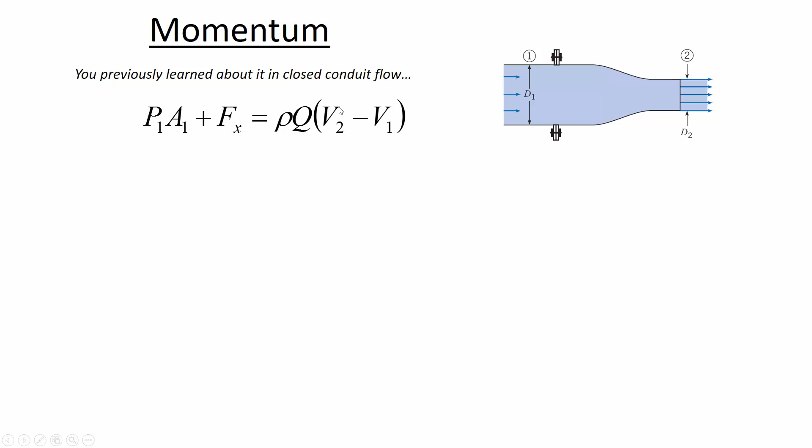Now in open channel flow, there's also momentum, and there are two components of momentum: the part related to external forces applied to the control volume. Consider water flowing downhill where the depth is changing—just to make the point that this is non-uniform flow, and momentum is conserved even under non-uniform conditions.

At location 1, where the depth is shallow, there's water on the other side of this water—this is just the water in our control volume that we're analyzing. The water on the other side pushes on it with a force equal to the depth to the centroid, the area, and the unit weight. Now, this first component is the dynamic component of momentum—it's related to the movement of the water, the fact that the water here has some velocity.

Now, the units are a bit odd right now. If we multiplied both sides by the unit weight, then you'd get the units of force there. Let me write that on the board.

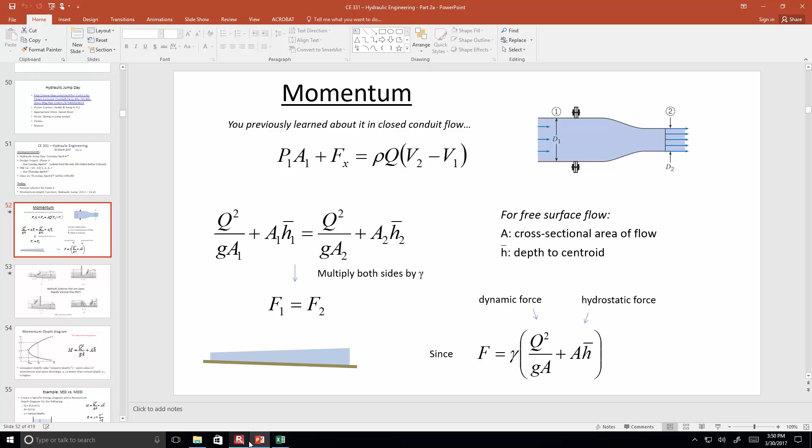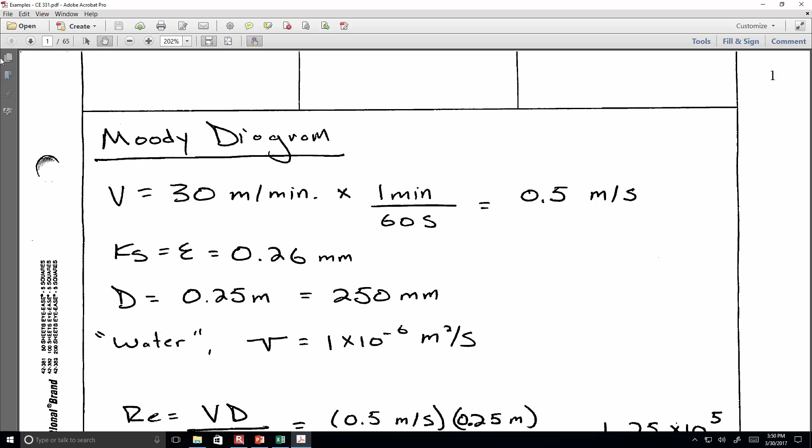For the benefit of those watching at home, let me pull up the examples because I have that same stuff that I just showed on the board, the units. I wouldn't want anybody to miss out on a good units analysis.

All right. Any questions about the units of momentum?

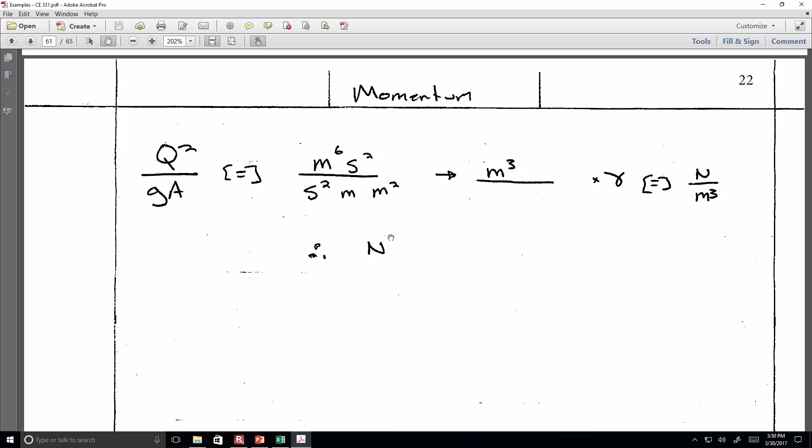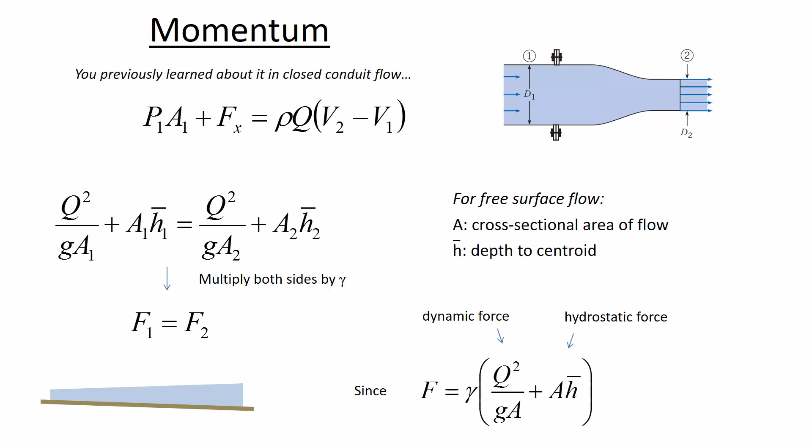So the two components of calculating the force in open channels from momentum, the dynamic force and the hydrostatic force, are related to the movement of the water and the forces on the outside of the control volume.

So why we care about momentum is related to hydraulic jumps. Tuesday is hydraulic jump day, so I figure you better learn a little bit about that before it occurs. Hydraulic jumps

happen when there's some sort of change in flow that forces supercritical flow to become subcritical flow. In this first picture, we have a really steep slope. The slope initially is so steep that it's causing supercritical flow, and that slope that causes critical flow is S sub c. So at point 1, the slope is steeper than the slope that causes critical flow. You know it's supercritical because the drawing shows where the critical depth should be, and our actual depth is less than the critical depth. So that confirms the slope is supercritical.

But then it's transitioning to a subcritical slope. We know it's subcritical downstream because the actual depth of flow is more than the critical depth of flow, what the critical depth should be—that's what this dashed line shows. Anytime you have flow that transitions from super to sub, there will be a hydraulic jump. Here, the hydraulic jump might be upstream of the transition, or downstream of it. It can actually be in both places depending on the exact downstream depth. So here's one instance that can cause it.

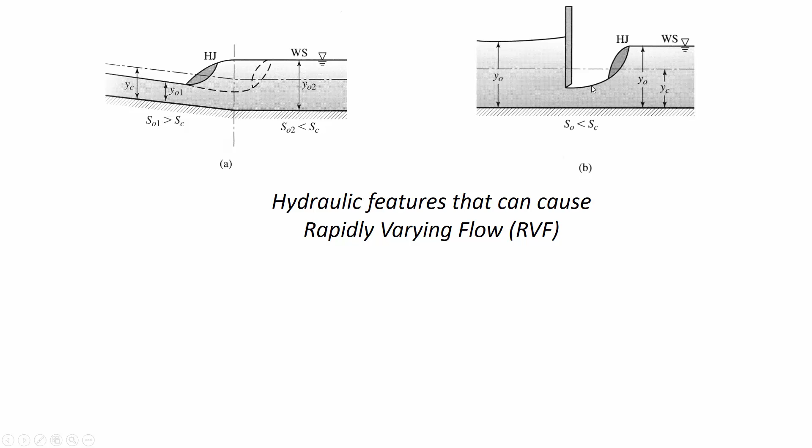So there are actually a couple of things happening here. There's gradually varying flow as the depth increases, but then there's rapidly varying flow at the hydraulic jump. RVF stands for rapidly varying flow, and that means a hydraulic jump. Gradually varying flow we'll talk about after hydraulic jumps, and we have to go through a lot of effort to calculate the rate at which water makes these gradual transitions.

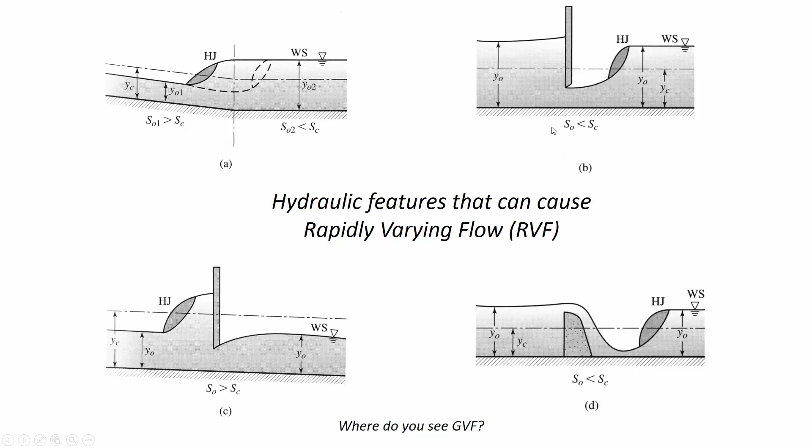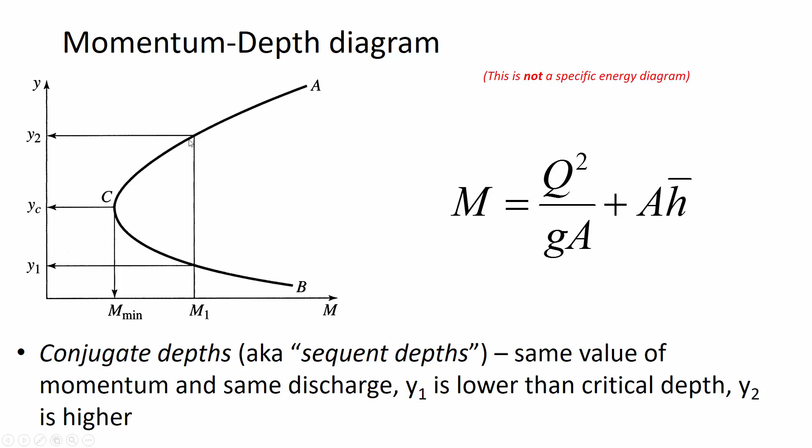Now, energy is not conserved through hydraulic jumps - there's a lot of energy lost in the turbulence of that roiling flow. But what is conserved through the hydraulic jump is momentum. So that's why we use a momentum depth diagram - graphically it allows us to find the downstream depth y2 after a hydraulic jump.

So let's try this out. If you have Excel with you, you can follow along - if not, you can just watch and be less amused. We're going to calculate this. There's a starting file online, so you can start from scratch if you like, but if you go to the course web page, there's a folder that says some class spreadsheets, something like that.

Oh, this computer's just miserable. It's so slow. Yeah, that one's pretty bad too.

Okay, so if you go to Blackboard, then you can get the starting file for this. I'll leave it up so you can do it later if you like. Under selected Excel files from class, it's the second one, momentum depth diagram. So here it is, our download.

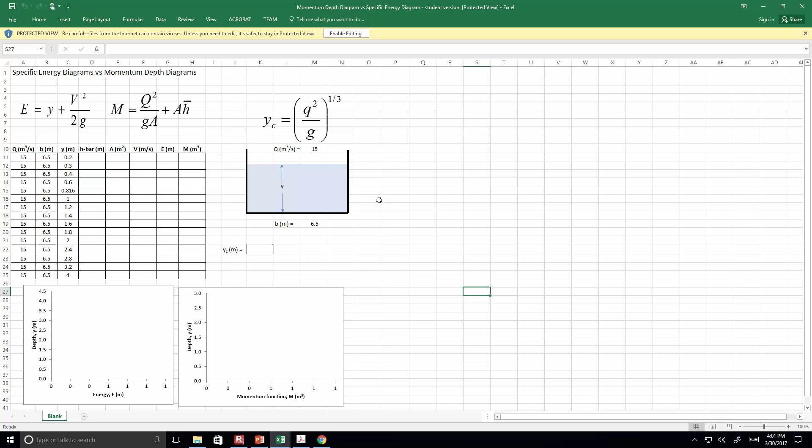So with this starting file, what we're going to do is calculate both the energy and the momentum.

I've just selected, based on creating a nice looking graph, a variety of depths. You don't necessarily always know what the starting depth and ending depth should be until you actually start graphing it. So it's not always going to be 0.2 as your beginning depth and 4 as the ending. You may need to make adjustments on the fly, but for purposes of illustration, we'll do these.

Now, h bar is the depth to the centroid. In a rectangular channel, the depth to the centroid is just from the water surface halfway down to the bottom. So it's easy in this case, because the depth to the centroid is just y divided by 2.

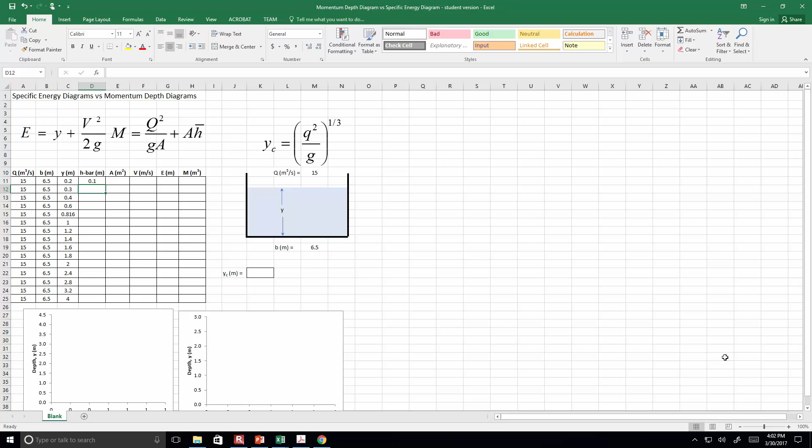So then I can drag that down and apply the formula everywhere.

Anybody want to hazard a guess why we're looking at the depth of 0.816? Good guess, you're right, that's going to be the critical depth. Just coincidentally, it worked out that way because I thought that'd be a nice depth to graph.

So the area here is going to be the width times the depth. Okay, so we've got the area, and then the velocity at each of these different depths will be the flow rate divided by area. Q equals VA, so V is Q divided by A.

So the velocity is progressively getting lower and lower. When we have deep water, it's because you've got a shallow slope. When you're trying to convey a certain amount of water through a channel, if the slope is shallow, that means the water is going to be very deep and you need a very tall channel to do it. But if you've got a high slope, then the water doesn't need much depth to convey that same amount of flow.

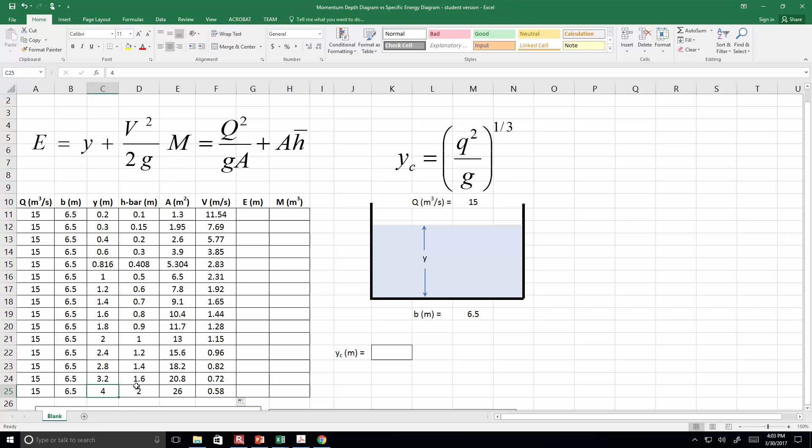Now energy, we're going to use this equation for energy, this one. It's going to be the depth plus the velocity head, so V squared divided by 2G.

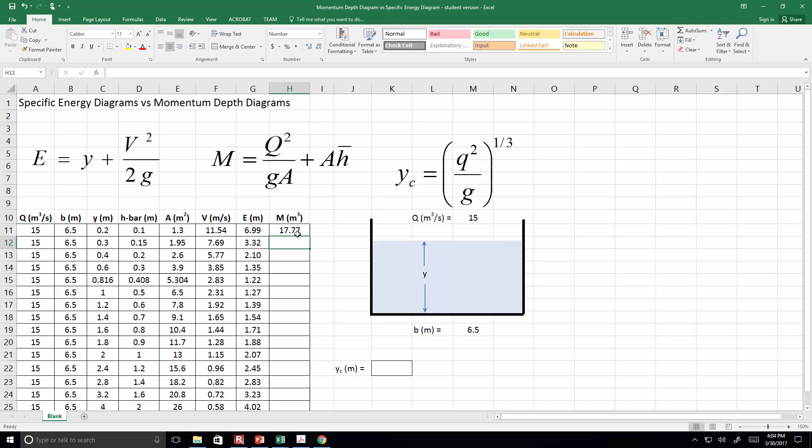So then I can apply that all the way down through. And then the momentum equation is going to be the flow rate squared divided by G divided by the area, and then adding the area times the depth of the centroid, h bar. And then we'll just add the momentum function down through.

Now here in the graphs, miraculously they appear. So on the left one here is the energy, specific energy diagram, and here's the momentum depth diagram.

So you use the specific energy diagram if you had like a step down or a step up and you wanted to find out what will be the new depth in response to that change. The momentum depth diagram, you would use this for a hydraulic jump. Two different applications, but now you know how to make both.

Any questions about that? Okay.

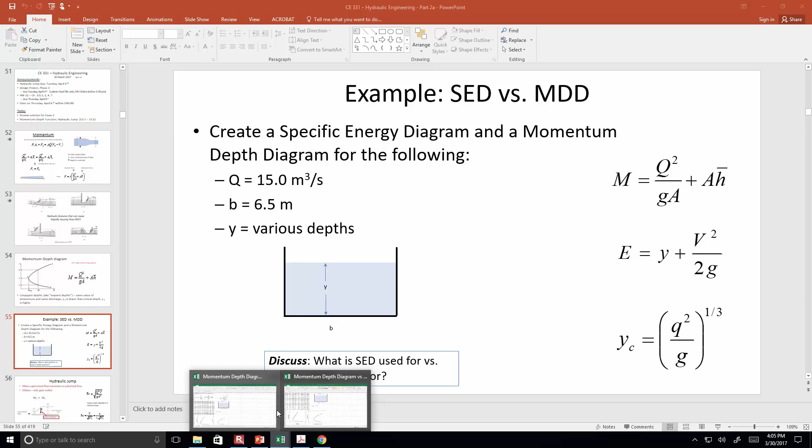Oh, I guess I wanted to calculate the critical depth here. Let's do that, just to show where that came from.

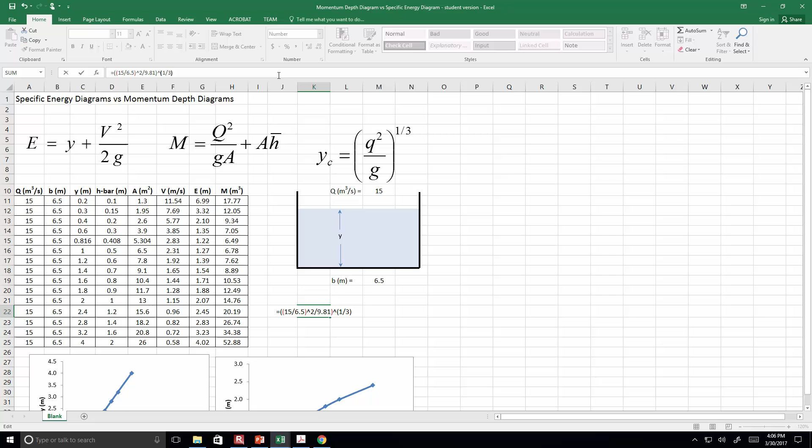So the critical depth would be the flow per unit width. So 15 is the flow, the unit width, the width of the channel was 6.5. Okay, and I need to square that, and then divide it by G, 9.81. And then I also need to put in the parentheses because I'm going to take everything to the 1/3 power. Okay, so the critical depth is 0.816.

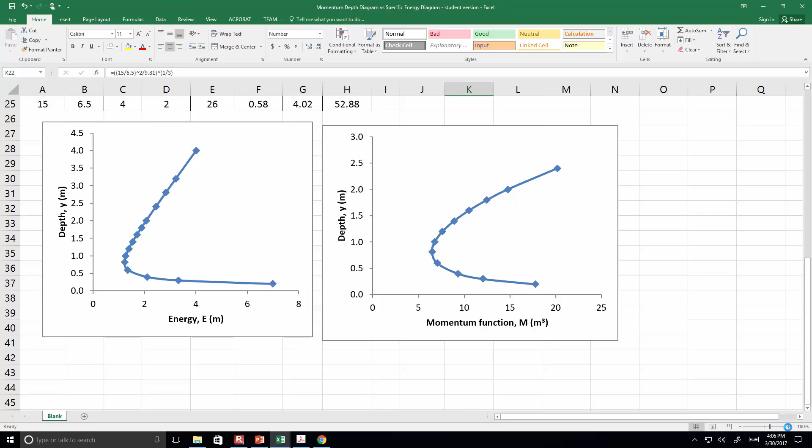So what that means is, here on this diagram, there's the supercritical portion of the momentum depth diagram below the critical depth. So anytime we've got flow less than this 0.816, we have supercritical conditions, and it'll go through a hydraulic jump up to the subcritical.

Now, there isn't anything as dramatic as a hydraulic jump when you have subcritical flow transition down to supercritical flow. Sometimes that can occur if you've got water approaching a drop-off, for example. There are other things that cause it, and we'll go into a lot of detail about what kinds of features can cause gradually varying flow.

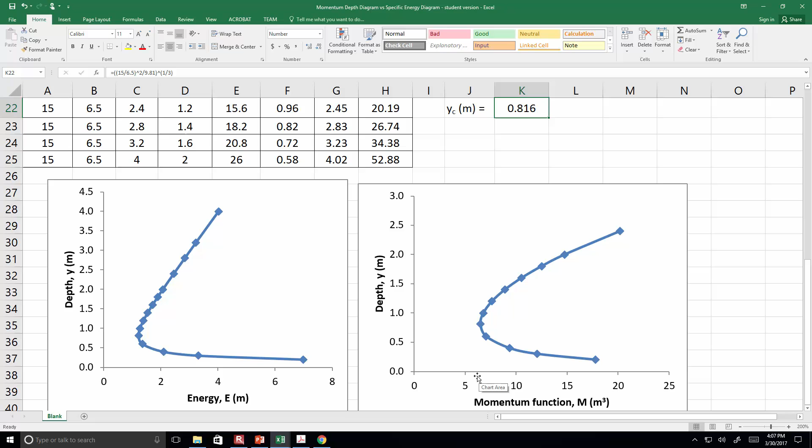But if you have subcritical flow approaching this drop-off, then it will go through a period where you've got maybe supercritical, briefly. So this was sub, and it's not dramatic, it's just a gradual transition. The only time it's dramatic and a big jump, a hydraulic jump, is when you're going from supercritical flow that can't be sustained anymore based on the shallow slope, and then it has to jump up to meet its conjugate depth.

That's right. You got it.

So the hydraulic jump has an upstream depth and a downstream depth. You can find the new downstream depth by graphing the momentum function, like we just did in the example, and solve it graphically. There's also a momentum equation where you can do it numerically. I'll show you that in just a minute.

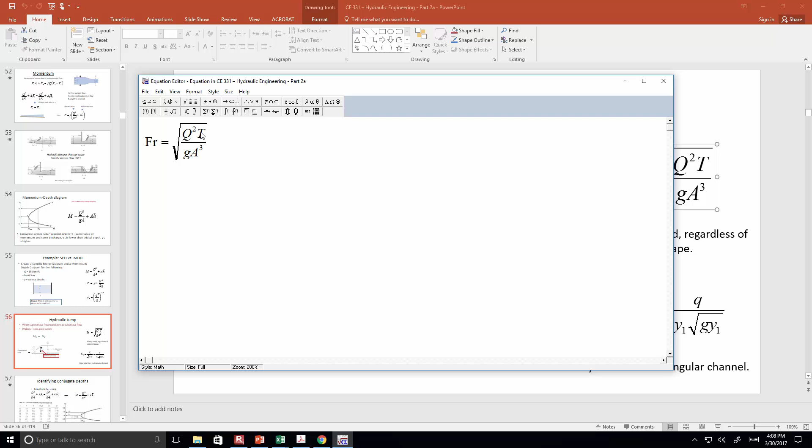It's important to remember how to calculate the Froude number, because the Belanger momentum equation makes use of the Froude number. This is the version of the Froude number you should use for any kind of flow channel, whether it's trapezoidal, triangular, or whatever else. But if you have a rectangular channel, you can calculate the Froude number this way, only if it's rectangular.

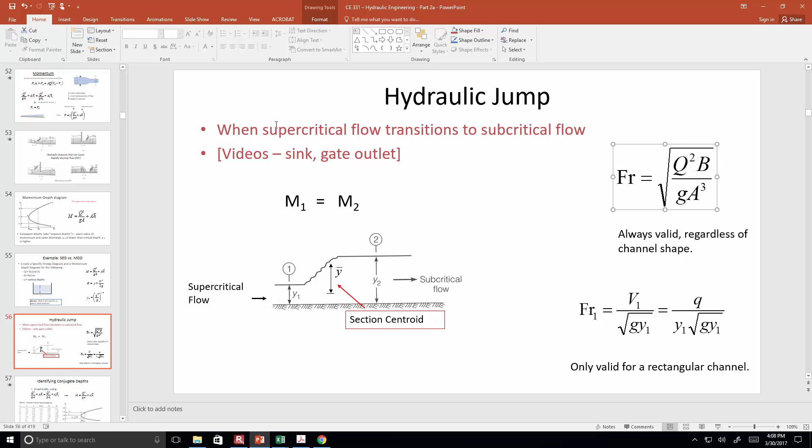Because you'll need the Froude number for the Belanger momentum equation. Now, I've got a couple of videos showing hydraulic jumps, but they are QuickTime videos, and I'm not sure if that's going to work in here. So let's just give it a try. There we go. What have we got? Maybe VLC. Usually works.

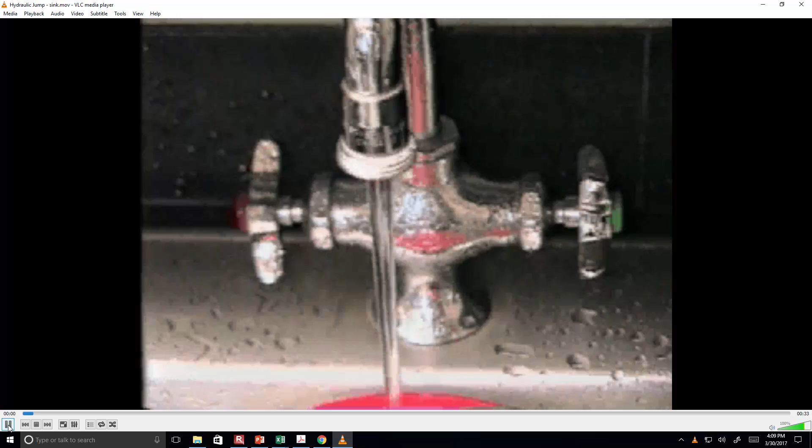All right, so this is someone doing the dishes, thinking about fluid mechanics, as we all do, right? So the water's coming out of the faucet and it's hitting a flat plate, and the water has velocity. So when it hits the plate, right now the water isn't flowing very fast, but they're going to turn the handle and increase the flow rate and therefore increase the velocity of the water. Watch what happens as they do.

All right, so now the water all the way around this rim, that's supercritical flow, and it can't be sustained on a flat surface. As the water is slowing down, it reaches its sequent depth, goes through the jump, and now the water is expanding radially. It's kind of hard to think in radial terms sometimes, since we usually just have these cross sections. But here the water is moving outward away from the stream, and it's a hydraulic jump.

So you don't have to have access to a flume to witness the beauty of a hydraulic jump. You could make one at your house today. But I'm certainly not suggesting that you do dishes, because I know that is not at the top of anybody's list, especially when you're in college. So they can adjust the location of the jump by varying the flow rate up and down.

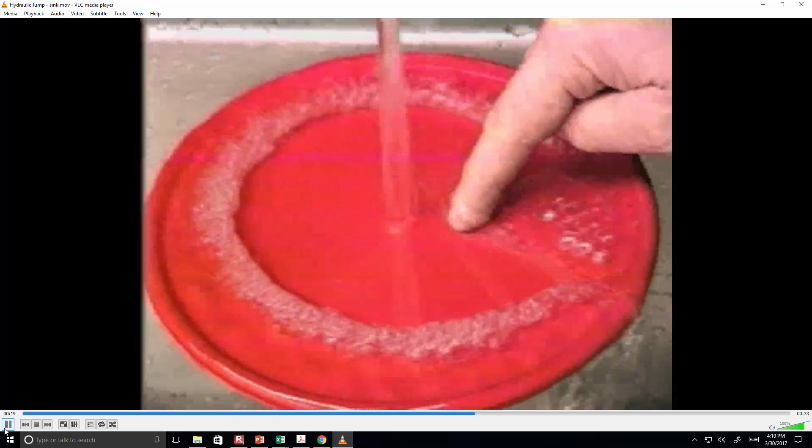And this guy's so into it he can't even resist touching it. Now the flow rate's so high that the hydraulic jump... well, you get the idea though. Supercritical flow, all around it is subcritical flow. Any questions about that? Okay, yeah, it is cool.

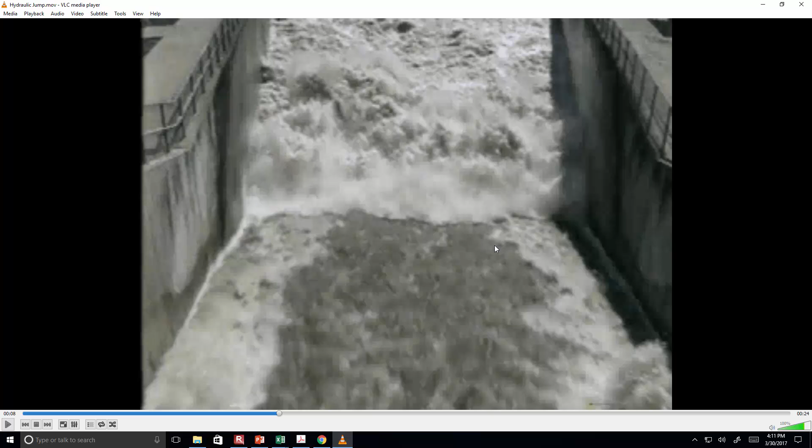All right, let's open the other one. This is a little bit larger scale. This is water coming out of a dam, and this is one of those cases where the water has a lot of velocity, because in this case it's coming from an underflow gate. So it's supercritical conditions, but it can't be sustained. This is in a chute that's specifically designed for a hydraulic jump to occur.

It's really heavily armored concrete, because you look at this roiling water, it's really turbulent, and there's a lot of energy being dissipated there. It would just tear apart any kind of an earthen channel and send that sediment downstream. So here we're seeing a hydraulic jump in its more natural environment. Well, not natural - it's an engineered system, but it's not somebody's kitchen sink, is the point.

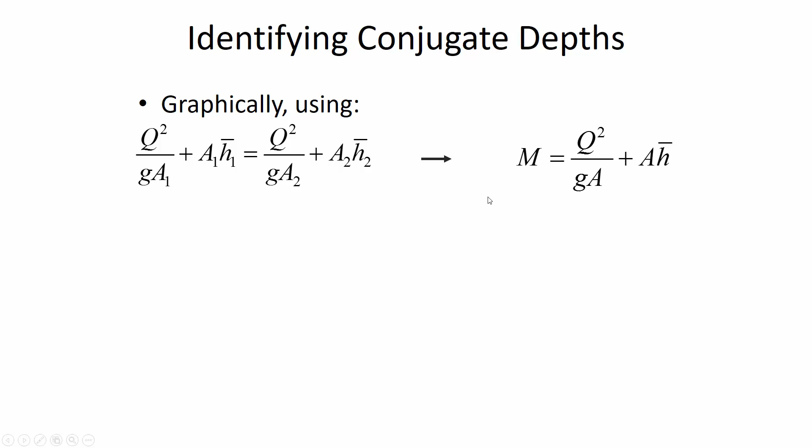So you can do it graphically by graphing the momentum function, and here's one illustration of how you could do that. Let's say, for instance, that we made a table of the momentum function, and then we graphed the momentum function, similar to what we just did in class. And we knew that we had an initial depth at 1 of 0.6. I assume that these are meters.

I don't know, it doesn't say. So we have an initial depth of 0.6. So you'd come over from the y-axis, find the intersection with the curve. So that's a supercritical depth initially, which means that eventually it's going to jump up to its sequent or conjugate depth. And that conjugate depth, we can come over here to y2 and find out that it looks like about 1.4 is the conjugate depth there. So the point is you're trying to find the same amount of momentum.

So here it was 5.33, so it looks like it's going to be between 1.2 and 1.5, where it has that same amount of momentum. You could solve this using goal-seek on Excel. You know, you could keep changing this depth - see the cell where it says 1.5? You could do a what-if analysis. Goal-seek, and tell it, keep changing this depth until this momentum, the one that says 6.01, keep changing it until it equals 5.332. And then that would tell you what is the depth that matches the same amount of momentum that existed upstream.

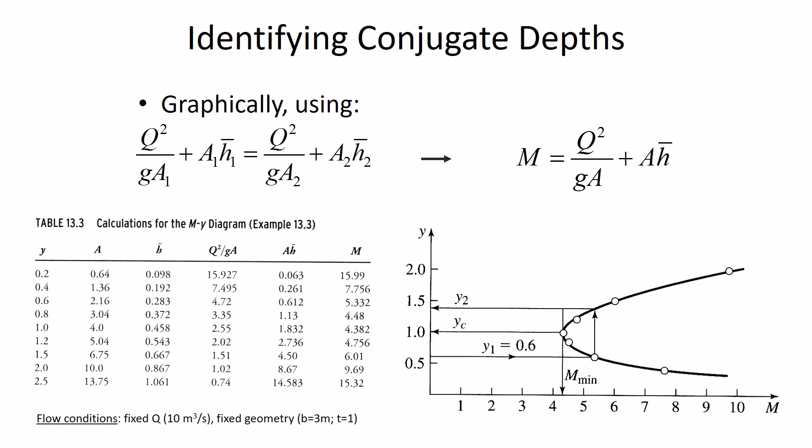So where's most of the momentum in the supercritical depths? Because the momentum, remember, is in two places - the dynamic component of the momentum and then the static component of the momentum. So here in the supercritical range, where the depths are low, where's the momentum? It's mostly in the dynamic term. And then on the other side of things, where you've got the larger than critical depths, then the majority of the momentum there just exists as the static term.

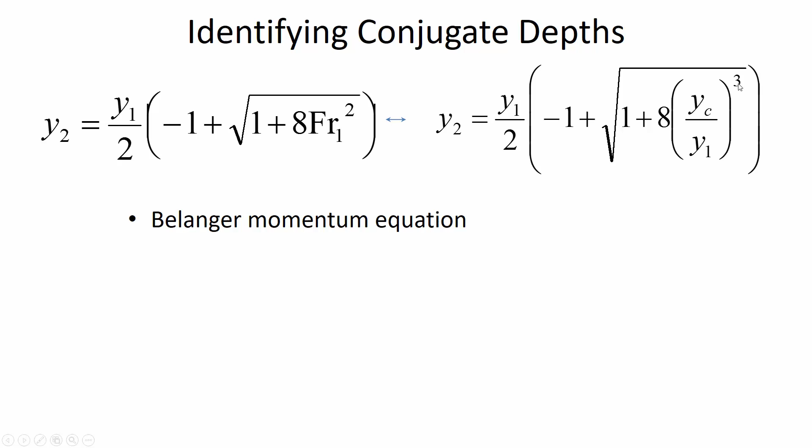Now, there are some assumptions here that you need to be aware of. We're not going to see perfect behavior in the lab when we're actually measuring the hydraulic jumps and comparing how good is this equation to what we actually measured. We'll see some variation, because this assumes a uniform velocity distribution. By that, I mean, remember when we were talking about the no-slip condition in fluid mechanics? Here's the water, and the water is not moving very fast near the bottom of the channel, but it's gradually getting more and more the further away we get from the bottom.

And so there's this curved velocity distribution. This is reality. Unfortunately, the Belanger momentum equation assumes instead that the water is slipping over the surface prior to the hydraulic jump. It's an easy to use equation, but you kind of are at the mercy of its poor assumptions. And so if you have a particularly rough surface or a really shallow channel, then that's where you're going to see the impact of reality not matching that assumption. But if you have relatively slow-moving water - well, I guess slow-moving water won't be supercritical - but if you have a deeper channel rather than a shallower channel, then this will be less of a problem.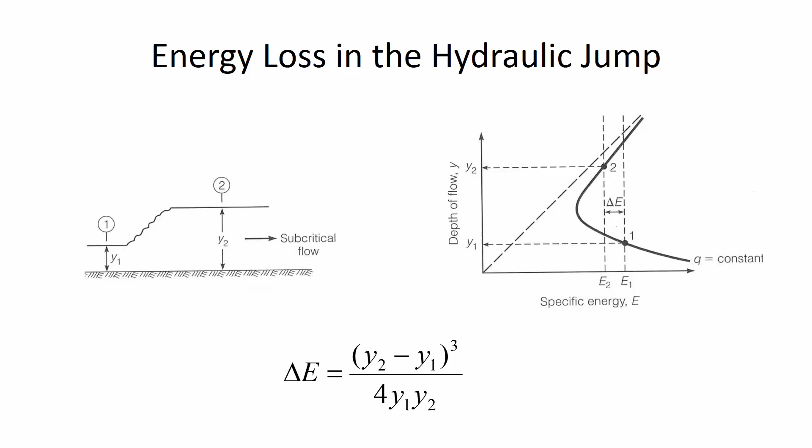If you want to quantify how much energy was lost, here's the formula to do it, delta E. It gives you units in terms of meters. So we can do a specific energy diagram, and if we know the before depth and after depth, graphically that delta E is simply the difference in specific energy, or you can calculate it with the formula. Momentum is conserved through a hydraulic jump, but energy most definitely is not.

I'd like you to get a chance to try the equation today. Let's say we have an upstream depth of 0.86 meters, and this is a rectangular channel, which makes it easier to calculate the Froude number.

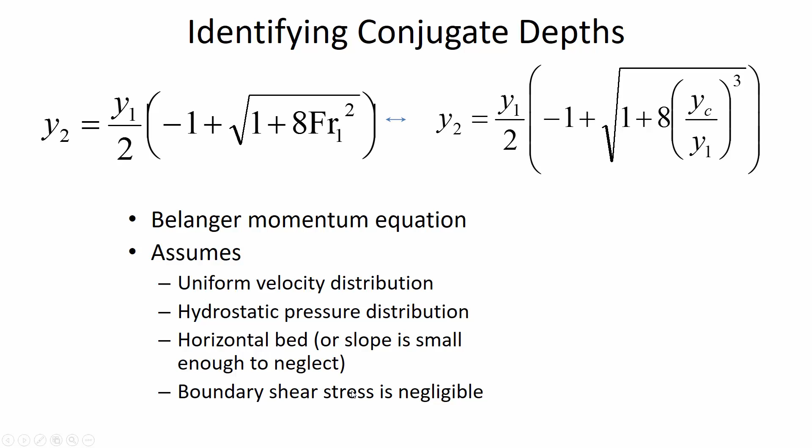Let's go back to the Froude number equation. I'll put that on the board so you've got it accessible. You can go old school and say the Froude number is the square root of q squared times the top width b, over g a cubed, or you can use that the Froude number equals lowercase q, flow per unit width, divided by y1 times g, square root of g y1, which is also equal to the velocity at 1, over square root of g y1.

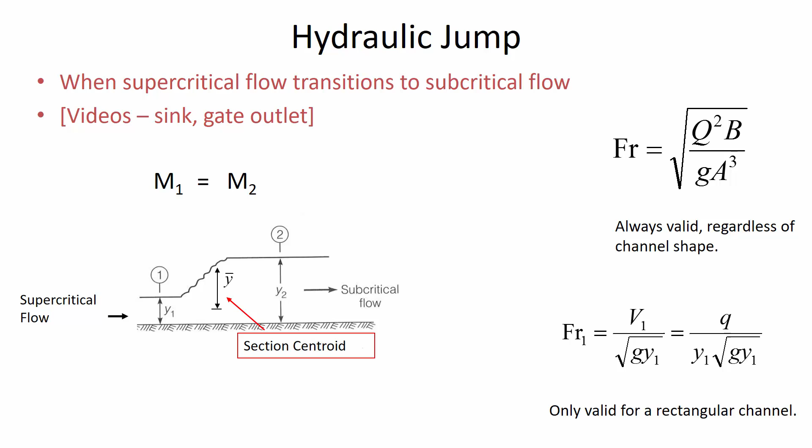Let's apply that to finding out what is the new downstream depth under these conditions using the Belanger momentum equation. This is asking the fraction of the initial energy that's lost through the jump. By fraction, that means find the difference in energy. That's part of it, but you also want to know how much energy was there at 1. So you're going to know the ratio of delta E to E1 in order to know the fraction of the initial energy that's lost.

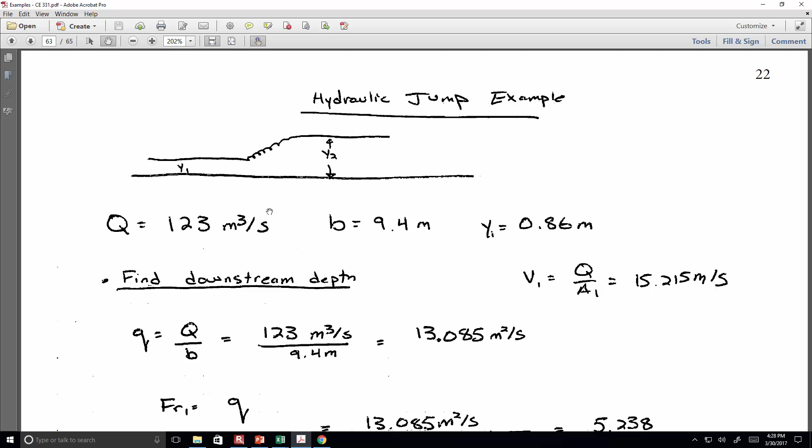The downstream depth should be about 5.96 meters, and I calculated the Froude number two different ways. I did it based on flow per unit width, which only works for a rectangular channel. Don't use this for a trapezoidal channel, like you'll probably see on the exam. Use the full version of the Froude number for a trapezoidal channel. Same number either way. Then you substitute it into the Belanger momentum equation, and we get the new downstream sequent depth.

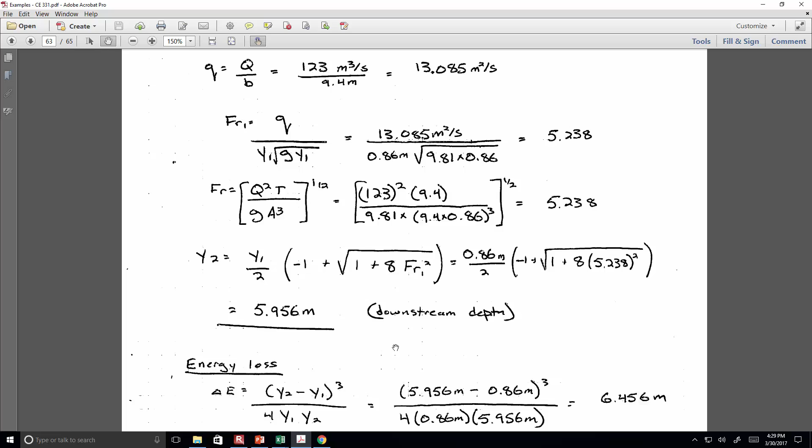Now, the fraction of the initial energy that's lost: the initial energy is the depth plus the velocity head. That's how you calculate the initial energy at 1. Then delta E is based on this formula: calculating the energy loss as the difference in the depths cubed, divided by 4 times the product of the depths.

So we're going to lose more than 6 meters of energy through that jump, and there was only about 12.6 meters of energy initially at 1. So as a fraction, 51% of the initial energy is lost through the hydraulic jump. Sometimes that's a good thing, sometimes you're trying to dissipate energy.

Hydraulic jumps are forced to occur in a certain location where you can control the conditions. You don't want the hydraulic jump to happen miles downstream in a channel where it may scour the channel, but rather you have it in a place that's armored, with blocks in place to absorb some of the energy.

We'll look at a video on Tuesday of a hydraulic jump in Germany that's in a river. It's naturally occurring, and people surf on it. It's similar to, has anybody here gone whitewater rafting before?

When you're going down, probably both of them, I've done the New and the Gauley. Sometimes they'll swing you around and you paddle to get into a certain spot, but then you can stop paddling and you're just sitting there. That's a standing wave. Hydraulic jumps are sometimes called standing waves when they occur in rivers.

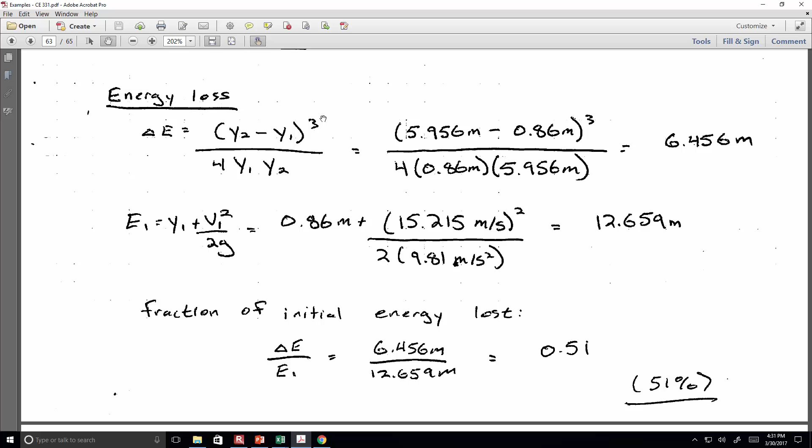In a standing wave? Did you have a helmet on? Yeah, okay. You're a rebel, don't do that. Usually they give the beer out after the rafting trip, not before. Sounds like they switched it this time.

So we could solve that same problem using Excel, where we're trying to find the sequent depth. We could have a spreadsheet with Q in cubic meters per second, channel width in meters, depth in meters, H bar, which is the depth of the centroid, the cross-sectional area, the velocity, the energy, and the momentum function.

In this example we had 123 cubic meters per second, and if we focus in, the width was constant, always 9.4 meters wide in this channel. Then for the depths, let's look at a variety starting at 0.2 through 7. I'll do 0.3, then 0.5, then 0.86, then 1, 1.5.

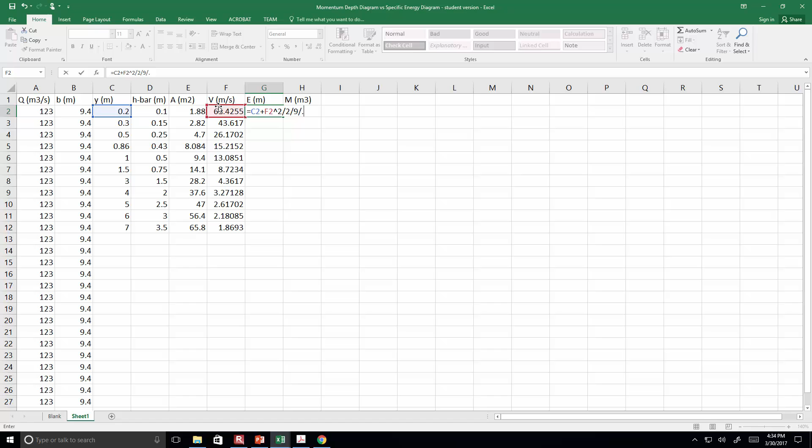And then to calculate the energy, which we need to solve for how much energy change there was, it is the flow depth plus the velocity head, so v squared divided by 2g. Okay, that's a lot of energy.

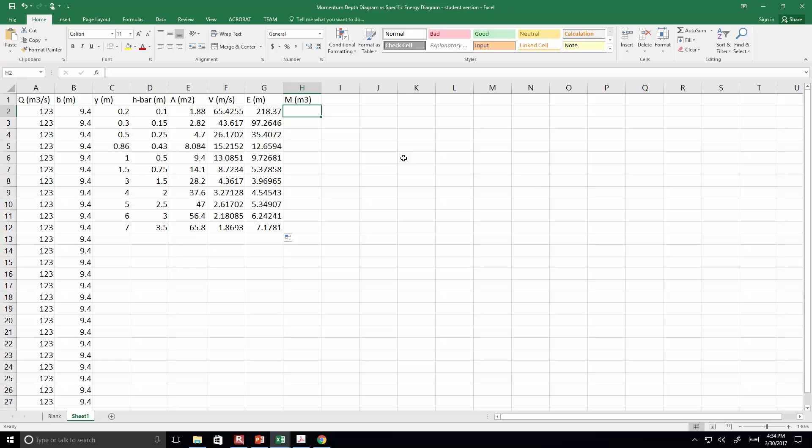And then the momentum function. Let's get that off of here. Here's what we're going to use for the momentum function: it's Q squared divided by g divided by the area, plus A times the depth of the centroid.

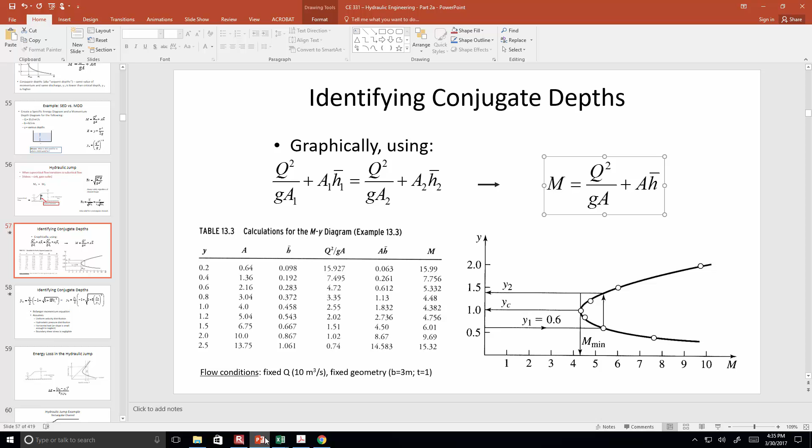Okay, so in this problem we initially had the upstream depth of 0.86. So here is our initial depth, 0.86. And what we want to do is find out where we've got the same 194 momentum function. So that's getting pretty close to it here at the depth of 6.

So let me do this what-if analysis: data, what-if analysis, goal seek. I want to change this depth, change the momentum function to 194.248 by changing the depth. So it will iterate that depth until it matches, and it gets 5.95, which is the same as what we had when we were solving it.

We had rounded off a little bit more, 5.956. So it matches. And as for the delta E, here was our initial, and here was our final. So delta E is just the difference between the two: the initial energy minus the final. Okay, so delta E is 6.45, same as we got before. So it all works out.

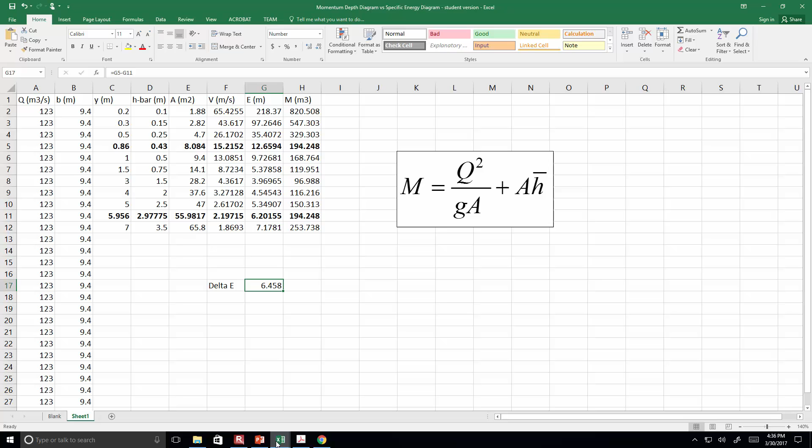Excel can be used, or you can use the Belanger momentum equation. The momentum equation is probably simpler. Okay, trapezoidal geometry. Any questions before we move on from this example?

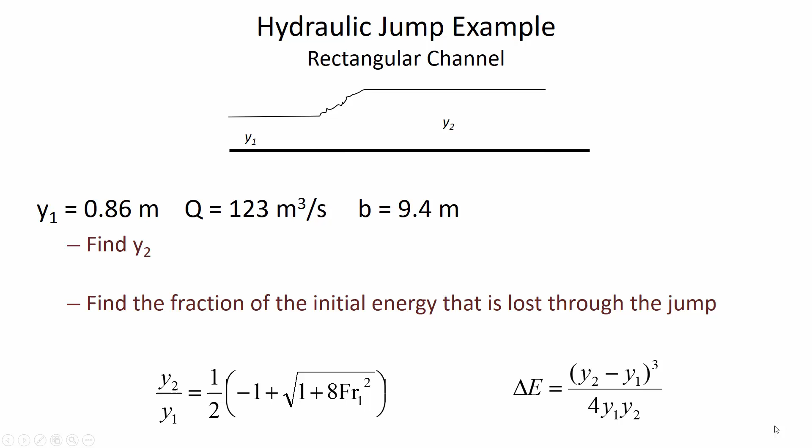The reason why we're revisiting trapezoidal geometry is to emphasize how you can find the depth to the centroid in a trapezoid, because it's not halfway to the bottom. Why not? In a rectangular channel, that's all we did. We said y divided by 2 is h bar.

But here, how come I'm not saying y divided by 2 for the h bar? Because it's got sloped sides. Yeah, so does that mean you're going to have to go deeper to get to the depth of the centroid, or it's not going to be as deep as compared to if it had been rectangular? Not as deep, right, because more of the area is close to the surface than if it had been rectangular.

All right, so what this example shows is how to find the depth of the centroid. Let's say we have a channel with a 1-to-1 side slope, and the bottom width is 3 meters. What does that mean the top width is going to be? If you've got a bottom width of 3 and 1-to-1 side slopes, the top width's going to be 5.

Exactly. Yeah, because if we do a little sketch of it here on the whiteboard... okay, that's terrible. All right, that's a depth of 1, and that means this side top width is going to be 1 on either side, so it's 3 at the bottom and overall the total top width is 5.

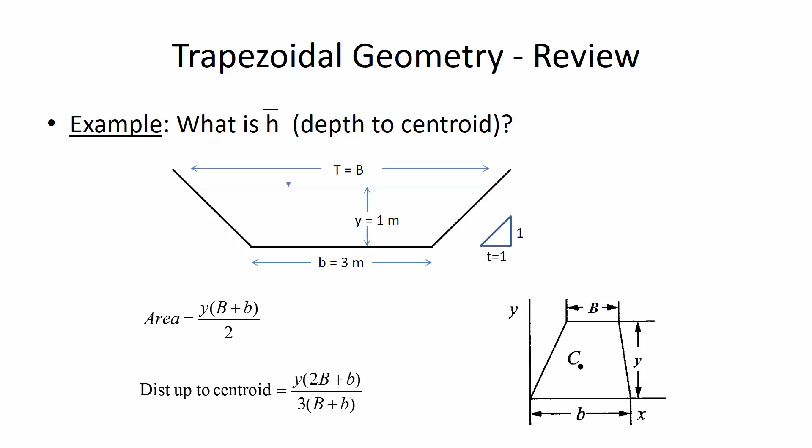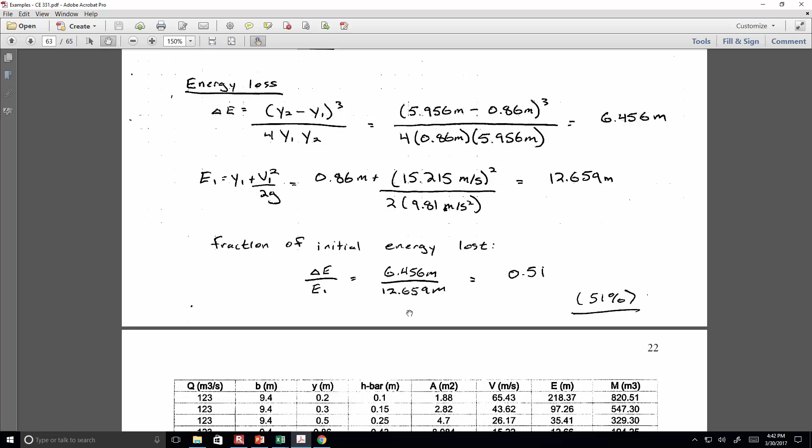All right, so we want to find the depth of the centroid here. The distance up to the centroid is 0.5417. I forgot to write it in here, so therefore h bar, which is the depth to centroid, will be 1 minus that distance that we found, 0.5417 meters. That is 0.4583 meters. That's the depth to the centroid.

And you'll need to be able to do that, I think, for the homework assignment. I think there's a hydraulic jump in a trapezoidal channel. So that's how you can do the h-bar.